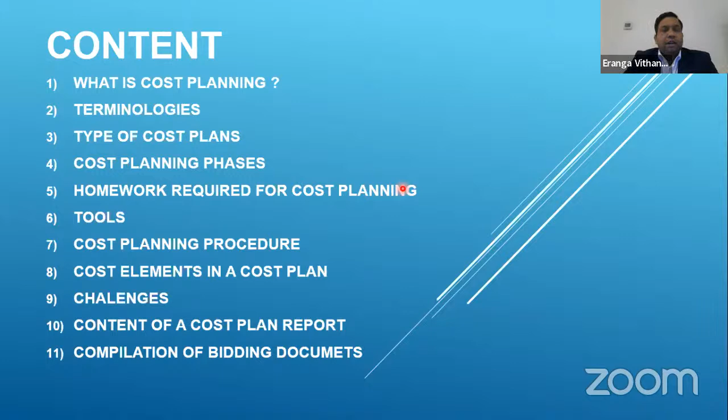Let's move to the presentation. Actually, what is cost planning? There's no proper definition, but it is a way of controlling the estimated cost during different design phases of a project. So in the upcoming slide, I will talk about these different phases.

You might have been through these present phases, but I just summarize them for your knowledge. So theoretically, we are talking about methods of cost planning. If you try to read through the internet, there are many methods they talk about. I listed here, however, I'm going to explain to you the knowledge about basically the superficial area method. Other methods we use not in full, sometimes to validate our cost plan, or sometimes to justify our cost plan. In pieces and bits, we use other methods.

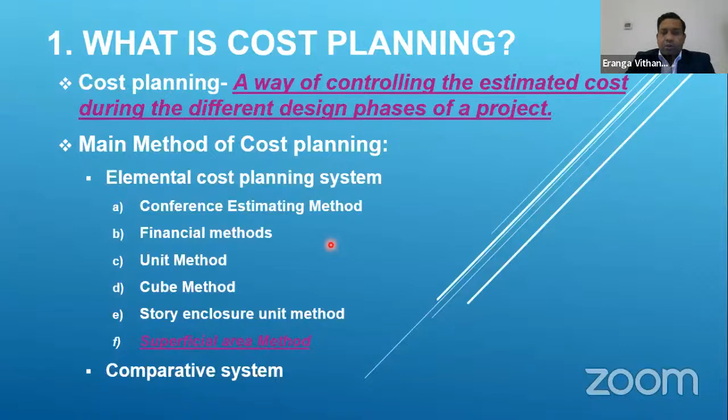If you want to get some understanding, you can read through. But today we are going to talk about the superficial area method.

Before we go into the very detail, I listed here some terminologies. Of course, some of them are definitions, some of them are terminologies. So if you are working in the quantity surveying field, you might have heard those things. But basically in the post-contract or construction phase, at site, you might not hear this type of terminologies.

The first terminology is called GEA. This is all about areas, because the cost planning method we are going to talk about today is the superficial area method. So GEA means gross external area. It's actually a defined term - there's a definition. I have given the reference where this definition was given: it is the RICS Code of Measuring Practice. RICS stands for Royal Institution of Chartered Surveyors. This is the well-recognized professional body who handles, controls, and educates all quantity surveyors throughout the world.

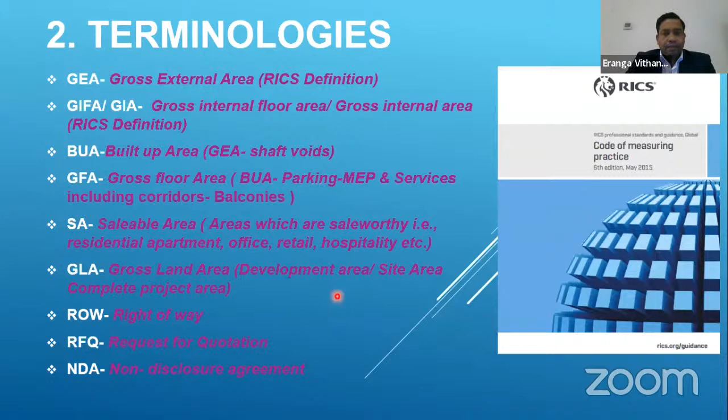Now I'm going to tell you the types of cost plans we usually prepare. I've listed 4 major cost plan types that we make in Dubai. Building works cost plan, and I've given an example for you to understand what we mean by building works. Another one is infrastructure cost plans, roads and utilities basically - those are the examples we talk about as infrastructure cost plans.

Another cost plan we do in Dubai is basically a utility building cost plan. It is quite different from usual buildings like high-rise residential buildings or shopping malls. It is like power plants, substations, pump stations, and district cooling plants.

And there is another type of cost plan we call a master plan cost plan. Basically in the Gulf region, UAE, and now this trend has almost spread through KSA as well, to develop master plans which include buildings, roads, utilities, maybe metro lines - it's a master community development. So a master plan cost plan includes all of this: buildings, infrastructure, and utility buildings as well.

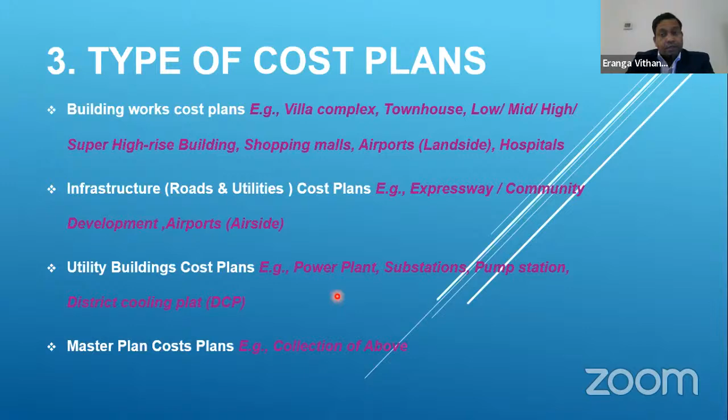So these are the main types of cost plans we prepare during this pre-contract period.

Now I'm going to talk about phases. Hope you can recall what cost planning is - it is all about controlling the cost in different project phases.

I'm sure you also know that in UAE, we get building cost designs at these stages: pre-concept, sometimes called budget, then concept design, schematic design, detailed design, and tender design. For infrastructure work: concept design we call CMP, concept master plan; preliminary design, PMP, preliminary master plan; and DMP, detailed master plan.

These are the design documentation release stages, and of course we are aligned with the design stages. So we are asked to prepare the cost plan, sometimes not in all these phases, but sometimes yes. In some cases, some clients skip the concept design as a design stage - they review that as design documentation, but QS is not called for a cost plan, and goes straight to the schematic design. But these are the cost planning phases. In some developments, yes, we are asked to prepare all 5 cost plans for one building.

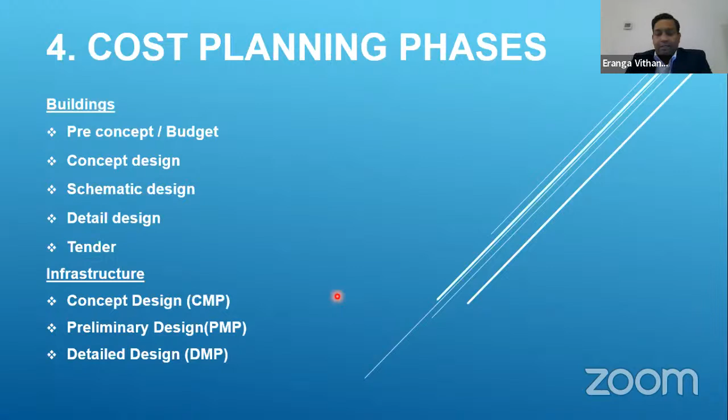Now we came to a quite important point in cost planning. I call it homework, which means if you are asked to prepare a cost plan now, if you haven't done any homework, if you don't have this data with you, you can't do it. So it's kind of recurring or repetitive work. Whenever you want to do a cost plan, you should have this homework ready with you to prepare the cost plan. The first very important item is benchmarks.

Since we use the superficial method in the initial design stages, as I mentioned - pre-concept, concept - you will not have any design for the buildings or design for your project.

It's just a report, 10-20 pages, but still you have to give the cost. Now we cannot say to the client, no, this is not enough for us to prepare the cost plan. So that is your experience, that is your homework, that is your pre-work for the cost plan.

So if you see that three graphs, I'm not sure it is visible through this presentation, but I will share this presentation at the end of the day with the training unit, and it will be shared to you. So you can go through with this graph a little bit, making zoom in. So this is basically what we said.

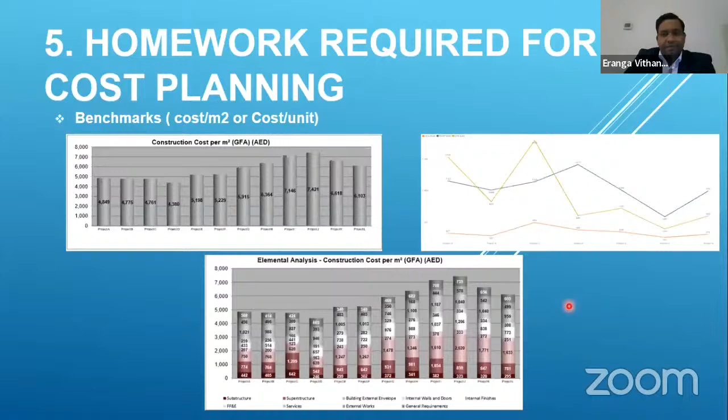So the second important data that you should have in your hand is the rate database. This is nothing else but the rates from recent tender returns, because recent tender returns reflect the fresh price as per the current market rate or condition. Whenever we use or prepare a rate database, we maintain this type of data. There's no hard and fast rule or fixed format - this is the format we prepared for ourselves.

For example, concrete - we log all the information, what type of development, what quarter of the year, the project name. In 2021 this is a villa project, and second quarter of 2021 this is the rate, fourth quarter of 2021 this is the rate, and in '22 this is the rate.

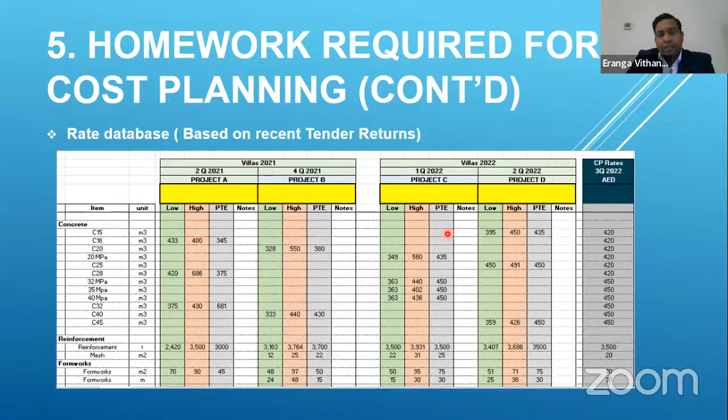So once we receive the design documentation, we go through it and check what is the appropriate benchmark or appropriate rate for this - it should not be just the recent tender returns. From this type of rate database, you understand the pattern of how rates or current market prices change. So we have forecasting facility with this type of data, and we can pick the relevant rate for a cost plan. Of course, the third item is the suppliers and vendors list.

Yes, even though we use the first two items for cost planning, this part is also very important. Why? There are some systems in the project which should not benchmark from previous project.

A very good example is lighting. As far as you know, lighting is an industry that's changing very frequently. For the same light fittings, if you get a price yesterday, it's different today. Many reasons due to the competitiveness and due to the material escalation and everything. So for this type of system, we used to go to the market and collect the price, which we usually never benchmark. That is the trend.

So some systems like AV system, we call audio visual, especially the LED screen, that is also another fast changing section. So that also we usually go and take the market price.

So the last item is the market researches, publications, bulletins. In the Gulf region, usually there are many bulletins and publications which overall forecast the construction industry. What will happen in the next 6 months? What will happen by the end of next year? Those type of bulletins will help us in general to understand the future impact on cost.

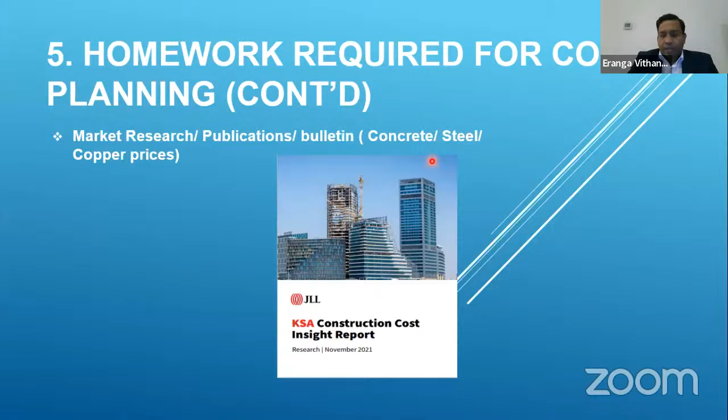Let's move to our next slide.

Next, I'm going to talk about what tools we require for cost planning. Well, we need a good measurement software.

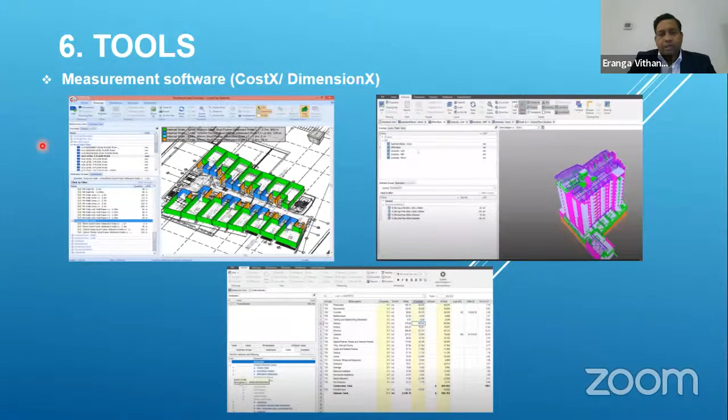I think you might have heard, some of you are even practicing the software called CostX. Now in the UAE region or even MENA region, this software plays a good role. So if you are practicing it, try to improve it, or if you are not practicing, try to find some sources. Don't spend a lot of money, but this will be really helpful software.

We are mainly using it for pre-construction. Now our company is trying to understand the importance of this CostX - it is all live. Like if you use AutoCAD to measure something, you will measure it and you won't have a record.

It will be recorded on paper and it will be very difficult to carry out further. But in CostX, all live.

If I tell a little bit about CostX, you have the measurement facility as well as costing facility. You can use any format in the drawings, PDF, DWF, AutoCAD, sketches, whatever. So you can measure from this software, in 2D and 3D. If you're using a Revit model, yes, you can extract the quantity through this CostX. It's really useful software.

The very important part is the costing part. There is more flexibility, measurement live, even rates live. We are maintaining a rate database here based on the CostX. It is really a worthy software.

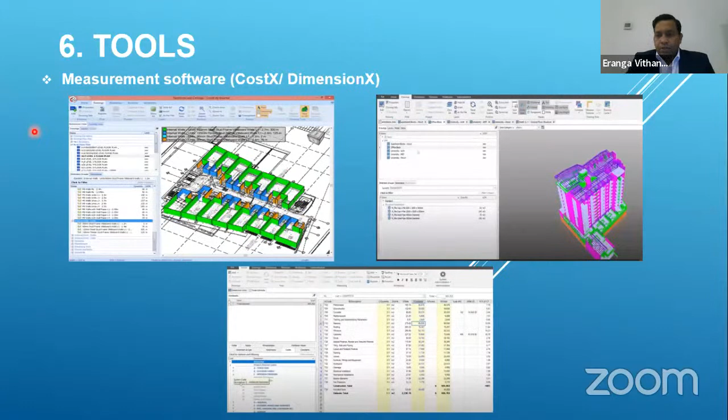If you can try to learn it, you will have a better value in the Gulf, especially UAE, KSA, Oman, or anywhere. So we should have the cost planning in hand. I'm not telling CostX is the only one we can use for measurement, but in my organization, Omnium International, we are using this software completely for cost planning.

Now recently management has decided to move them into the post-contract with the old pre-contract detail. So whenever they want any information on what was done during the cost planning, they can check it. So that is so live. And other tools I have, I have listed here.

New rules of measurement, NRM1. I have given the pictures side. You can get it, I'm not sure whether it is available on the internet. If somebody needs it, I can give it.

Other one is Civil Engineering Standard Method of Measurement, CESMM4. Other one is Principle of Measurement International, and Microsoft Office, mainly Excel and Word. These are the tools that are mainly required during your cost planning and presenting it.

You might think, what can I do with Microsoft Office? Yes, Excel is required in some cases, as well as Word.

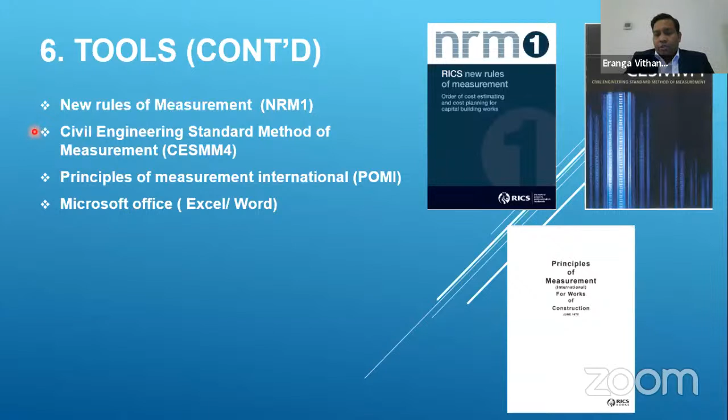Now I will move to the very important part of the presentation: how you will do the cost planning. So I call it the cost planning procedure, which I will brief.

Maybe I'm not telling you how to do a full cost plan in these steps, I leave it for you to learn yourself. If you have any doubt, anytime, I have given my WhatsApp and email information. You can WhatsApp me, and I might not be able to answer at the same time, but of course I will answer through your training division CCBC cell.

So the first one: once we get any design documentation to our hand to start any level of cost plan, we have a design review. As a QS, a quantity surveyor, or a cost planning manager, we should check the completeness of the design documentation to commence the cost planning at that particular level.

So of course we are maintaining a checklist, and once all the information is complete enough for us to start the cost plan, we start it.

Otherwise, as you can see in the second item, we go for a query sheet. What a query sheet basically does is, we clarify or request information that we have not received at that particular point, or we clarify the discrepancy between the design documentation.

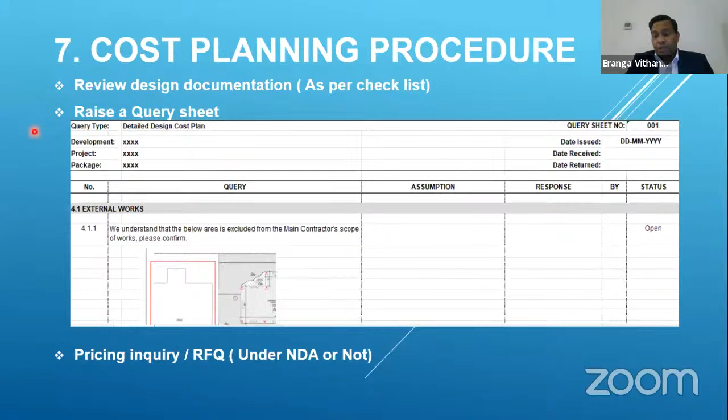So the third item is pricing inquiry or RFQs. As I explained in the previous slide, at any stage we usually go out to the market. We call it market testing or pricing inquiry, which we need to get fresh prices for some systems. Sometimes we will not ask for the concrete, but we will request a quotation for lighting or for AV systems, because those are specialists, and sometimes it is not similar to other projects. It is unique. So that is another very important step or task during this cost planning.

Then, at the same time, once the cost planning team assigns resources, one should start the area measurement. As I said, since we are using the superficial method, the area of a project plays a very important role. So we have to start the measurement, and we usually prepare a document called schedule of area, or SOA. This is one format which we are using currently in our organization. As per our benchmark, we are doing all the area measurement we require. If you need the GIFA, or GIA, yes, we measure it. If you want to measure BUA as per their definition, yes, we measure it.

And GFA, yes. After measuring different areas, we work out the built-up areas, like BUA or GFA. This is very important, and we have to understand, as per the definition, how to measure this, and we prepare this type of schedule of area to go ahead with the cost planning.

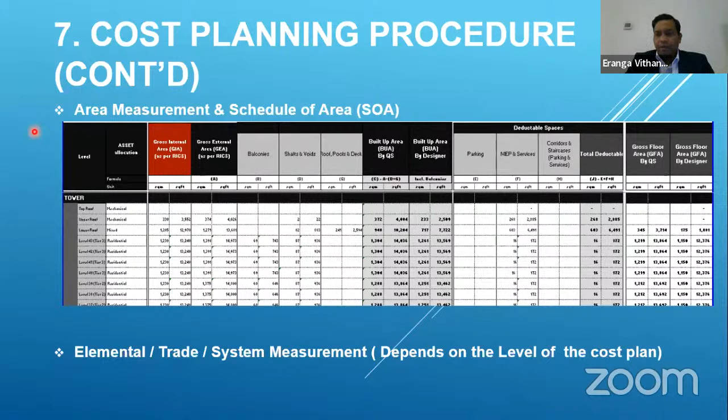Well, these are the steps that we are following, and then we go for the cost plan, preparing the cost plan level. So once we are ready with query responses and all design documents, we floated, or sent out, the RFQ and did the area measurement. So we have to prepare our cost plan. For the cost plan preparation, we are using NRM1 for building cost plans. If you had a chance to refer a bit to NRM1, we call it elemental breakdown, which has these elements. The building is elementalized into sub-elements for us to estimate the cost in the respective element.

So we call it facilitating work, some people call it enabling work, substructure, superstructure, internal finishes, fittings, furnishings and equipment, call it FF&E. Services, we usually call this MEP, which includes sanitary wares, MEP, and conveying. These other two items we are usually not using, and external work.

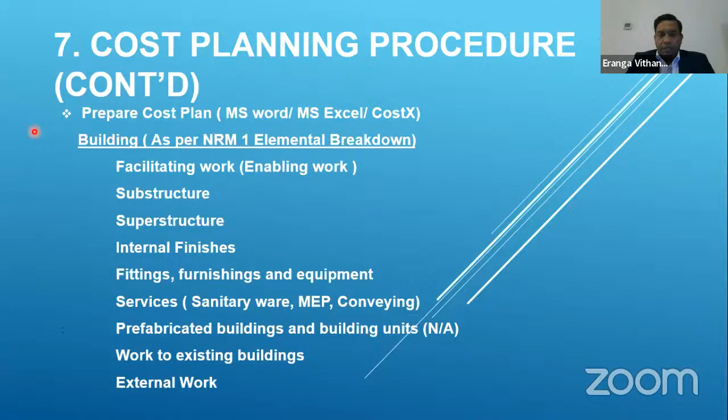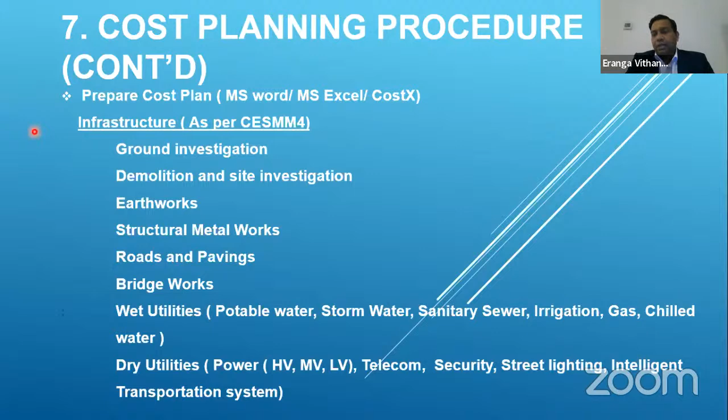I have put here three steps that we are following in the building cost plan for you to understand. As I said at the beginning of the presentation, it is not easy to explain or give an idea about how to prepare a full cost plan, but I'm giving you a unit or idea of how to do it. So it will be a collection of this type of cost. In the concept design, as I said, for the superstructure, for example frames, we will not get a single drawing to measure it, of course. So how will our cost planning be done at concept design?

You can see the description: allowance for concrete frame, cost per meter squared based on the benchmark project. We measure this - 397 in this particular project is GFA, the area. So for this type of project or similar nature of project, the benchmark is this much. Then the frame cost is decided or estimated. This is what usually happens in the concept design.

When you move into the schematic design for the same project, I got this example. You can see it was measured at the schematic design level. We might have been provided with the drawing to measure columns and beams for concrete, rebar, and formwork. So we measured it - if you can see the quantity, it is measured quantity. This is where the rates database comes into the picture. We should have this cost data - how much concrete for this particular type, or rebar ratio - and then we can price the superstructure based on the measured work plus our rate database.

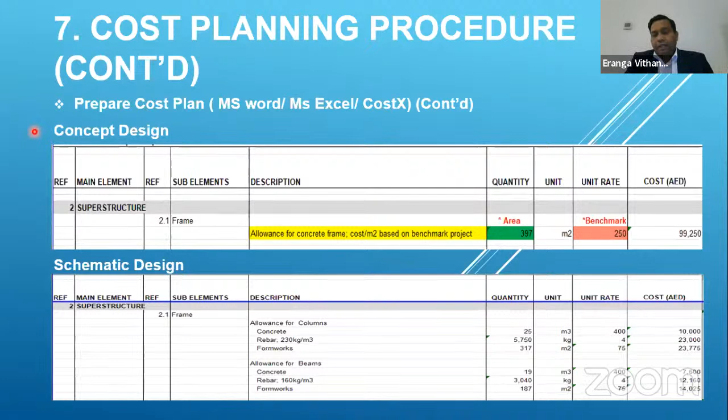I got the example for the same item. If I move to the next design stage, we call it detail design. You can see the same item - we completely measure it. So we will have a better breakdown, for concrete or formwork, segregated properly and measured in full. This is how we are pricing element by element.

Whenever you refer to the NRM, you will get to know how this building is elementalized into components. Like MEP, for example - it's not called MEP, it calls services. Then, for example, air conditioning - then it will go to cooling, or it will explain ventilation. And then it will have a breakdown of equipment separate, distribution separate, or ductwork separate, this type. So I suggest you have a look in NRM to understand how this building is elementalized.

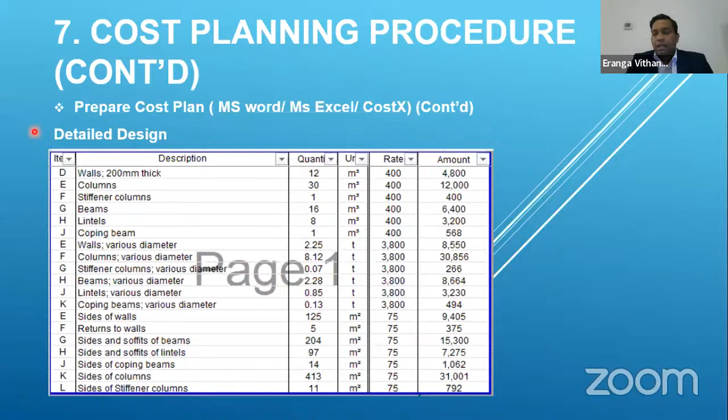Another very important aspect in cost planning is value engineering. I hope in the previous presentation, CPD, it was explained what value engineering means - I'm not going to repeat it, you know what it means. Even in that same presentation, the presenter said this will be mostly discussed in the pre-contract stage. Yes, so this is where value engineering comes into the picture - to reduce the cost. Why do we reduce the cost?

Whenever a client fixes the budget, he will fix it based on some parameters or some previous data. It might be that his current design is not the same as it was. So at that time, of course, we call it over the budget. Once we prepare the cost plan - let's say at the schematic design level - and it is 20 million above the budget, that's when we are asked to do value engineering.

Of course, this will be initiated by a designer because he is the designer. We don't just keep quiet and say, okay, it's your headache, you take care of it. No, we help because as a quantity surveyor, as a cost consultant, with our previous experience, we know the areas where the project cost has increased, or still areas where he can save cost. For example, sanitary - a designer might have specified Toto, but Toto is, as you all know, expensive. But there are more products or ranges other than Toto to get the same quality, same durability, so we used to propose at that time. But as mentioned in that presentation, it is always by the design.

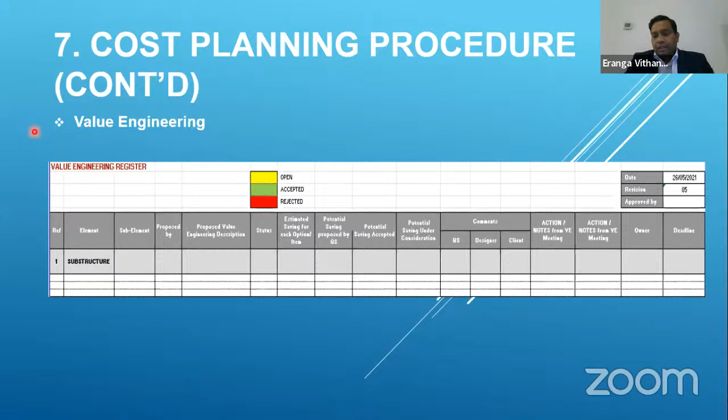Sometimes it is not value engineering. Even though we put it into that category, it will be a de-scoping. But still it is under value engineering, as the definition says, we have to maintain the same functionality with less cost. So this plays a very important role in every cost planning stage.

There are more areas we have to take care of during the Middle Eastern construction industry. A very important area is the authority and service provider estimates. I'm not sure how applicable this is in the Sri Lankan context. I have listed a few authorities and service providers - basically government bodies, and service providers from the private sector - like DCD Dubai Civil Defense, Dubai Municipality, Dubai Electricity and Water Authority. Those are the government entities who come into the picture during the project.

So they have their own cost. It's not always dealt with directly by the client, but sometimes the client asks us to put a cost for this authority fees - we call it authority fees or authority charges. Etisalat is similar to our telecom providers like Sri Lanka Telecom. Empower, Emicool, Tabreed are district cooling chilled water providers. Lootah Gas is a central gas provider. Those entities are called service providers, and they also have their own fees applicable to the project. In some instances, clients ask us to include the authority service provider charges; in other cases we don't include them, but we should be aware that such a cost heading exists.

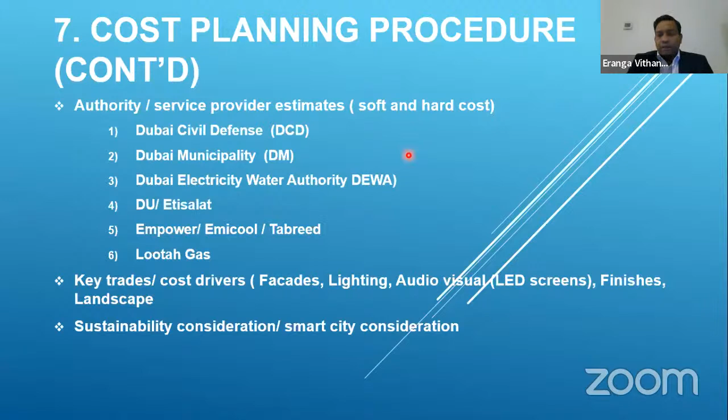This is the cost plan element in the cost plan - I mean cost heading, cost element. Of course hard cost I discussed in previous lessons. And then there's general requirements, project design fees, and many project stakeholders in the project.

So, client contingency - because the client might have something in mind to add to the project at some point, he advises us to allow this much contingency. Then the design consultancy contingency - during design development we will not pick up everything at every stage, so we keep some design contingency. Other development project costs mean that in any development, sometimes you have to pay for land purchase. This type of cost also, some clients ask us to include.

So that cost also we have to include. Otherwise, we call it a below-the-line item. Below-the-line item means these are systems the client has in mind whether to put in the project or not, but still wants to see the cost. So we include that item also, like the photovoltaic system, PV, which we commonly call solar.

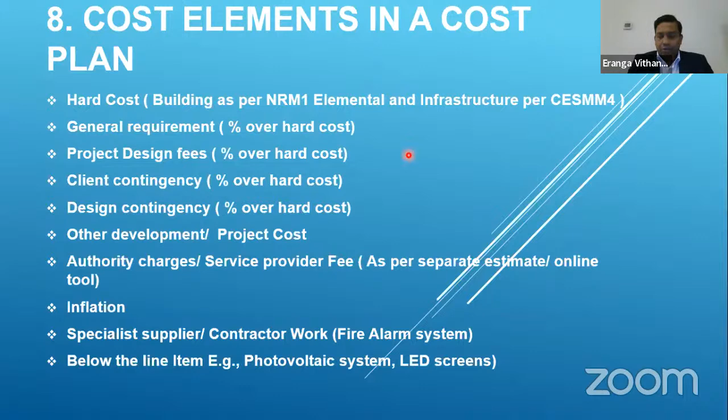Now the challenges. As I said in the beginning, it is not easy. In 5 days we cannot finish a cost plan due to this type of challenges. So what are those challenges?

Delaying and no response to queries. Even though we send 10 queries, we will not get a single answer. So we are in trouble trying to clarify the disputes and ambiguities.

And denying to enter the NDA. Suppliers sometimes do not enter into the NDA because, due to confidentiality in some projects, we issue a non-disclosure agreement for them not to disclose project details. But some suppliers refuse, saying non-disclosure is not acceptable to them, so they will not enter the NDA, and we must maintain the confidentiality of the project details.

Whenever we go to the market, suppliers need all information about the project. Since the project is not published, or not yet gone to market, we are not authorized to disclose the project details, client details, the location of the project, or the type of the project. So it is difficult to get prices from the market.

Suppliers also don't return with quotations. Whenever there's a 30 million or 40 million lighting package, we will not get the price. And again, it's a challenge.

Accuracy of design information is another issue. Most projects in Middle Eastern countries, especially in UAE, we get 2D as well as 3D drawings called Revit models. But the accuracy and quality of the 3D models is often not enough for us to do the measurement. If you compare 2D measurement versus 3D measurement, 3D measurement is really fast because it's more of an extraction, not manual measurement. But if the quality isn't enough for us to extract the quantity, again, it's a challenge. Especially for MEP, up to now, I haven't found a proper 3D model to extract the quantities from.

Introducing Würth Hollow Wall Anchors. The hollow wall anchor is suited for setting attachments in plasterboards, perforated brick ceilings, hollow body ceilings, and other boards. Würth hollow wall anchors are available individually or in a convenient ORSY 100 carry case. To install the anchor, pre-drill the desired surface, slightly loosen the screw to allow enough space for it to be mounted with the hand mounting pliers. Simply insert the anchor into the pre-drilled hole and apply pressure to the mounting pliers to complete the process. Würth hollow wall anchors are a must-have for indoor mounting applications.

Thank you, organizers. Iranga, I'll start with a basic question that I had, along with some requests that came through the WhatsApp group and chat box. Nalin here—regarding cost planning, I had a bit of doubt about where this comes into play. We know that at the pre-contract stage we have to submit a priced bill of quantities. Are we talking about cost planning before the pre-contract work, or once the contract is awarded? Or is this the life cycle cost planning you're referring to? When does this cost planning start?